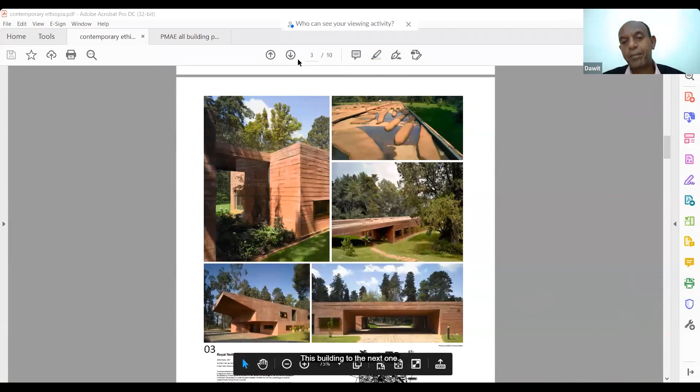The next one is an iconic building by Seleka Belai. When we talk of regionalism, Seleka talks about responding to the climate. You would never see a staircase, a basic circulation, exposed to the elements in the northern hemisphere—you always want to insulate circulation. But Seleka used circulation as a form-defining element. He used the stair, and the stair you can see inside also gives a quality to the internal environment.

He uses minimal colors and always experiments with forms, with minimal windows. For him, using windows to give character to the facade is wrong. The most important thing is light, but not through windows—he is very playful with the use of light and how he admits it in. There are kinds of pigeonholes from the inside that really look like torch lights. They really admit light, but you don't see them on the facade. This is an iconic building, the stairs, an iconic building by Seleka Belai.

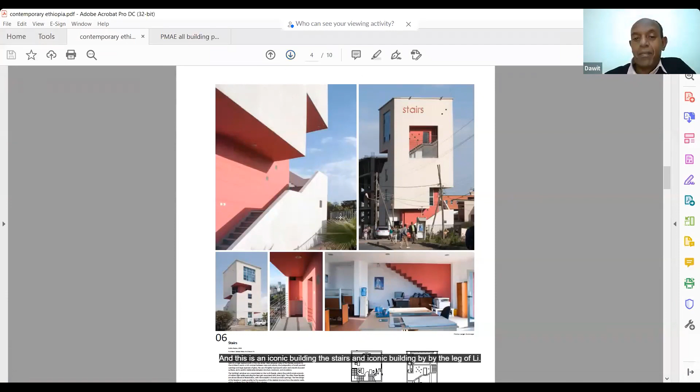This is a building built by a world famous artist. In 2020, Elias Sime was named the African Artist of the Year by the Smithsonian, one of the museums in Washington, D.C.

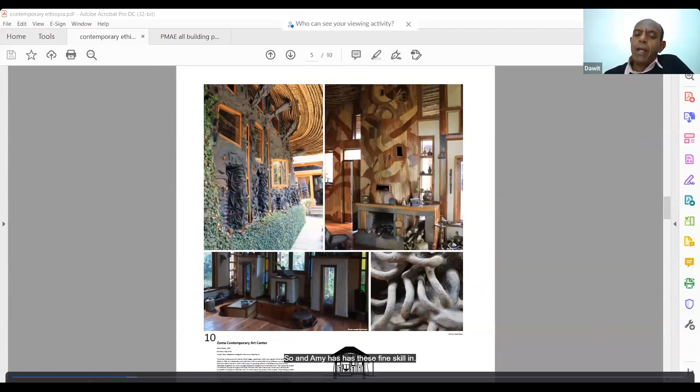Elias Sime uses discarded materials. The skin is made of mud, but the external things are all kind of recycled. If you look at the interior, you have all those mosaics out of wood, each piece recycled. The external material is in a way sculpted, like Antonio Gaudi in mud. Elias has this fine skill in designing the interior space, with negative spaces, positive spaces, space within space. It's a very good material to teach students how to articulate space, and everything is recycled and made out of mud. That's what makes this one special.

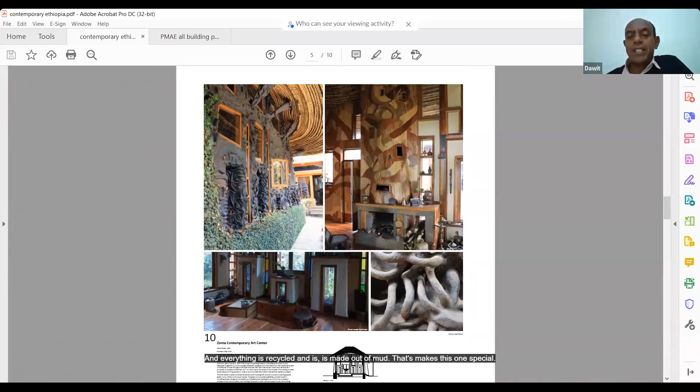This is Ben Abeba restaurant in Lalibela. It looks like some material from a sci-fi or alien kind of structure. If you look at it from the background, it looks very weird, but there were two young boys...

Sorry, did I miss it? Oops. Yeah, thank you.

So there are two young boys, and they carved these. They had a philosophy, and they had to build it there. They were also designing it while building, so they did not do a complete working drawing. They had to be living there for so many months, so it's a complex form. There is a philosophy behind it, but the aesthetics is very special. It's a restaurant, and sitting there, you would see from the top of Lalibela all the valley across the horizon.

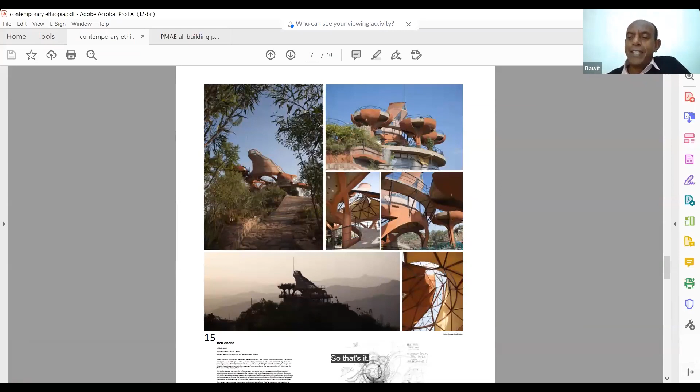Yes, this is the Yemreha building. It's a kind of cooperation between Koffi & Diabaté from Cote d'Ivoire and a local architect, Joseph Abba. It's very contemporary in the way it's used, the materials, how they are exposed. It's one of a kind in the city. What is basic to all the buildings is that they are all labor intensive. We use reinforced concrete 100%, with the exception of a few. It's basically cast in situ; there's no prefab in Ethiopia. And there is a kind of aesthetics that is achieved. That is what I can say about this building.

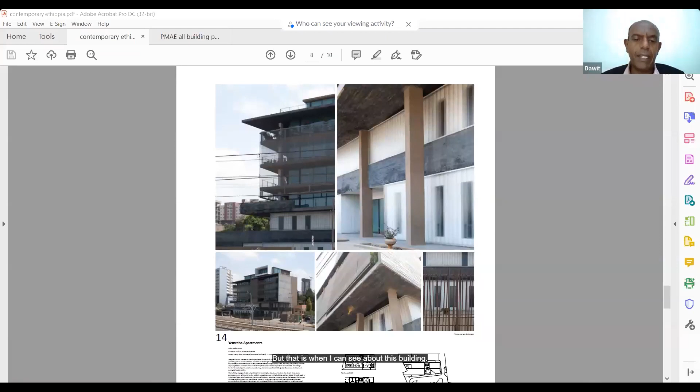If I can interject for a moment about the Yemreha apartments, there are a couple of projects in the exhibition designed by architects from other parts of Africa who are in Ethiopia. One of the things we really liked is that it helps demonstrate how architecture acts as evidence of the worldliness of Ethiopia, especially Addis Ababa, which is a global diplomatic capital. It's the home of the United Nations enterprise in Africa and also the home of the African Union. Because of this, there's a great amount of diplomats and foreign businessmen from all over Africa in Addis Ababa, resulting in projects designed by a really brilliant architect from the Ivory Coast, and you'll see other projects as well in our exhibition.

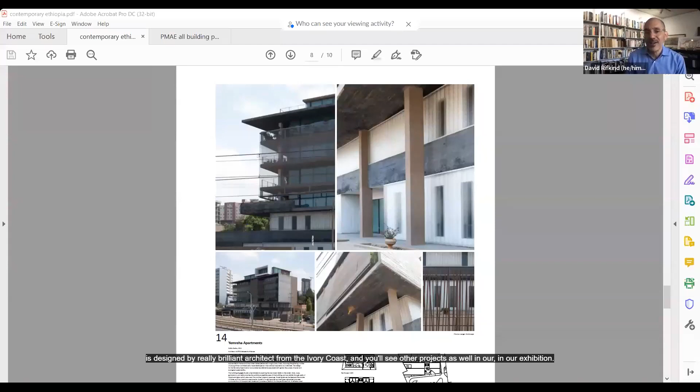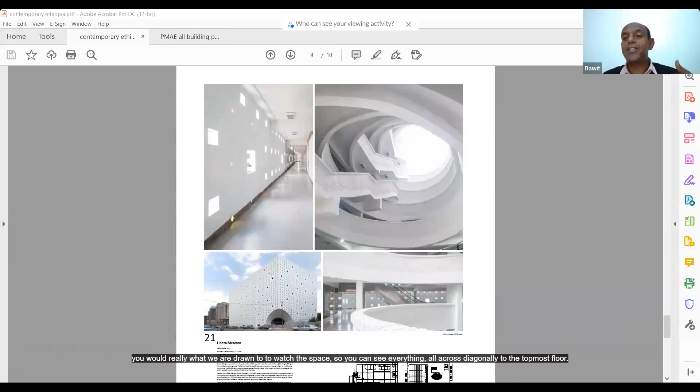I have not been there lately, but it is active, and the diagonal way the spaces go is very interesting. While crossing the street within the building, you're drawn towards the space, seeing everything diagonally up to the topmost floor. The facade material is also done in an innovative manner, using a low-tech casting method, but it really gives a fresh look to the otherwise nondescript facade of the city.

I was struck by how solid the exterior of this project feels, and how that diagonal corner seems carved away, like some of the much older buildings in Ethiopia carved from stone. I was so delighted to see how the interior is not dark or closed in, but has this really inspiring diagonal atrium leading you to the light.

Is it open air the whole time, or is the top glassed in? I can't tell from the image. I'm not very sure, I'll check.

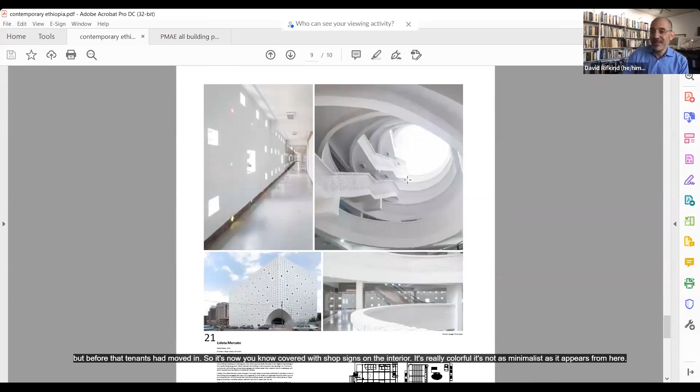No, it is extraordinary. And I remember it being glazed at the top. The one thing that is a little deceptive about our photographs is that we photographed there—actually the photographs are all by Jürgen Strohmeyer, our partner on the project—right when the building was completed, but before the tenants had moved in. So it's now covered with shop signs on the interior. It's really colorful, not as minimalist as it appears here.

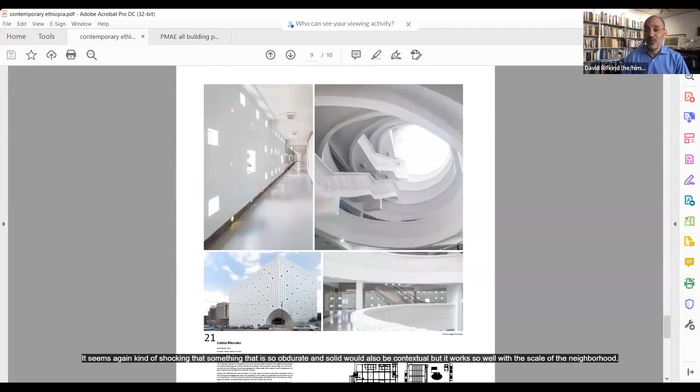Good to know, but I absolutely agree with what you said. The quality of it from the outside feels monolithic, like the rock cut churches in Lalibela, and then you enter into it and it is voluminous and light. It's brilliantly designed, and some of the things hard to tell from photographs is how well it integrates with the neighborhood. It seems shocking that something so obdurate and solid would also be contextual, but it works so well with the scale of the neighborhood.

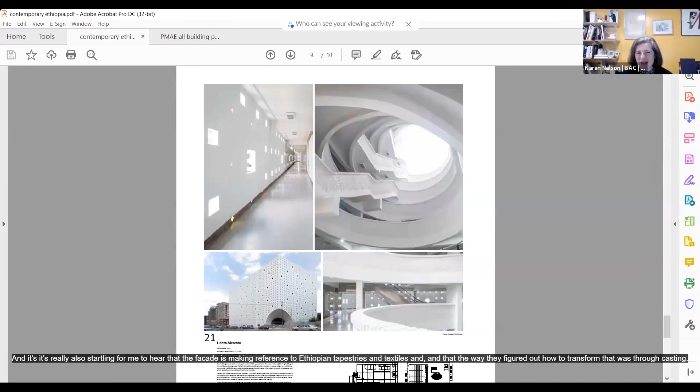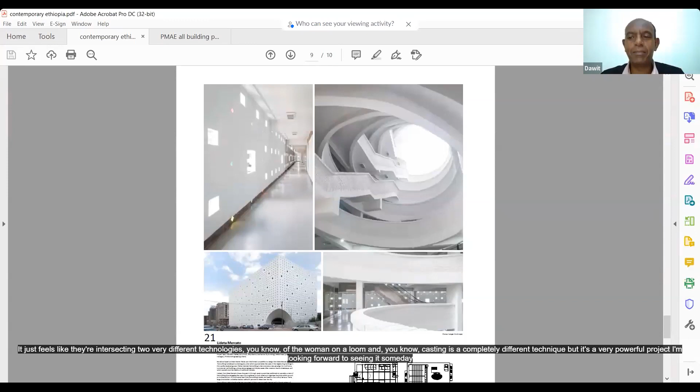It's really startling for me to hear, Dawit, that the facade references Ethiopian tapestries and textiles, and that the way they figured out how to transform that was through casting. It feels like they're intersecting two very different technologies—the woven on a loom, and casting, a completely different technique—but it's a very powerful project. I'm looking forward to seeing it someday.

I feel sad about this project because it's not realized. It was supposed to be built from a competition from the Ethiopian government in 2012, and the winners are from the Netherlands and Ethiopia.

It's very interesting—these represent the drums, like the emperors, when they had to decree, they would use the drum and then declare it before the court, so that would be constituted as part of the law, the legal entity. So these three drums represent two legislative bodies—I'm not very sure how they're called, the councils, the parliament—and the other is a library. They are surrounded by low-lying office space, and the public could also go up and access the roof, making it very near to the community.

I love those drums with the Ethiopian motifs again. If it were built, this would have been the best creative, eye-catching and iconic building in town. They were into the detail design—it was very huge, it really took a huge block at the city center.

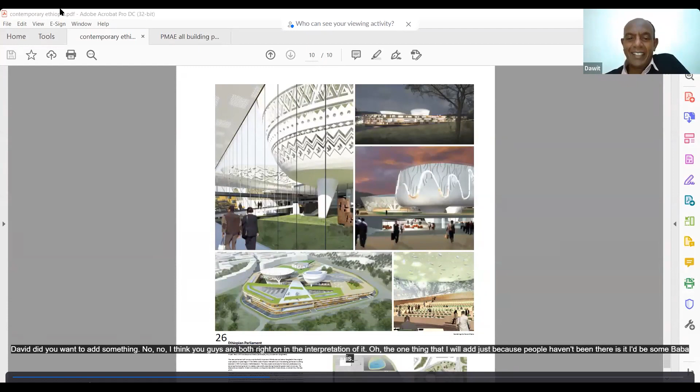David, did you want to add something? No, I think you guys are both right on in the interpretation of it.

The one thing I'll add, for those who haven't been there, is that Addis Ababa, like almost all Ethiopian cities, is quite hilly. The topography is dramatic—there's almost a 2,000 foot change in elevation within the city limits. This site is on a hill very close to the hill that was the center of imperial power when the city was founded.

Because of that topography, one of the brilliant things about the design is that this level top—the datum separating office functions from the dramatic meeting functions—was at ground level at the uppermost part of the site, and several stories in the air by the time you get downhill. This created a tabletop-level public outdoor space that the public could enter at the uppermost level, right at a major traffic intersection.

This was such a wonderful idea because these complexes in Ethiopia tend to be very highly controlled and off limits to the public. Originally there was this promise that the public could inhabit that main upper level, which would have been a really dramatic change in the way you think about the relationship between government and public space. It was a really beautiful project, and it's unfortunate it wasn't realized.

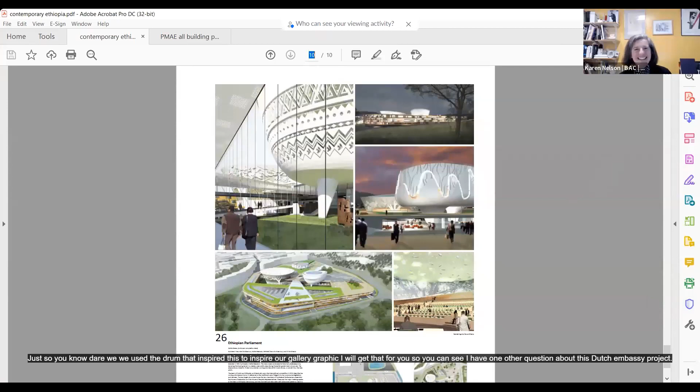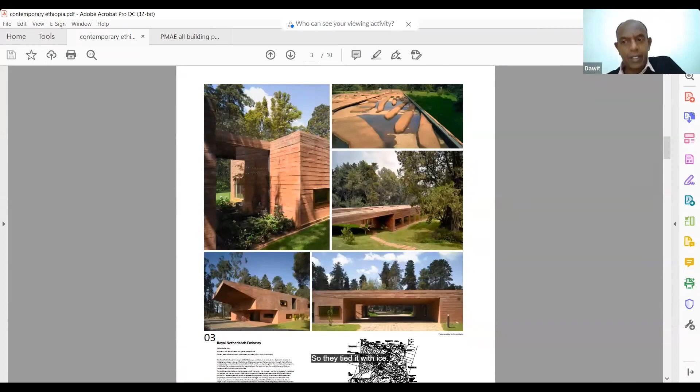The color is basically the color of the sandstone where it's carved out—if you go to Lalibela you'd see it, but here they've used colors with the concrete, finished roughly to relate it to the rough texture of the rock churches. So is this something they actually got from local soil and sand, or did they dye it to match? They dyed it to match. I see, yeah, it's fantastic.

There's a question from Rebecca DeJenny in the chat. Her question is, by designing contemporary buildings, do you think Ethiopia and other African countries are losing touch with vernacular architecture? Not necessarily the projects you've selected, but she remembers going to Addis and seeing so many buildings that seemed out of place.

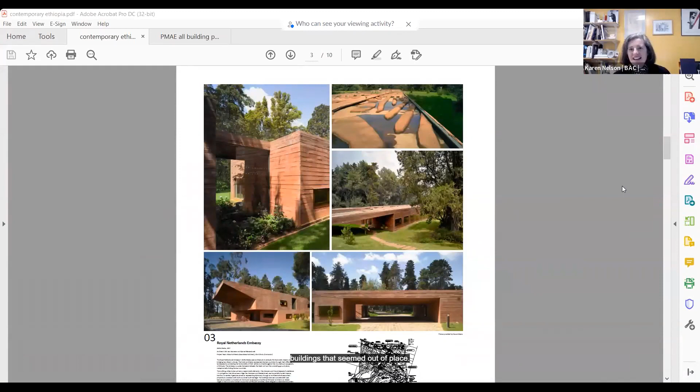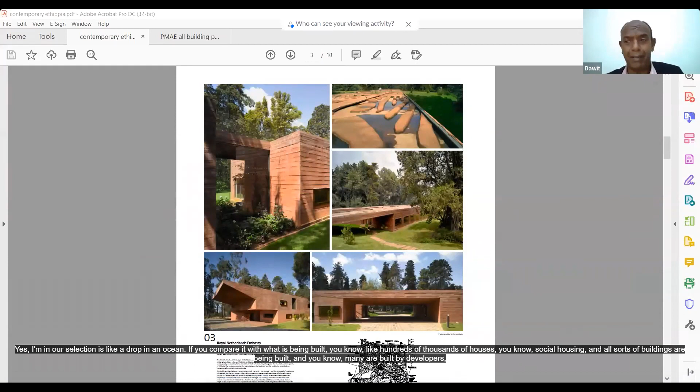Our selection is like a drop in an ocean compared with what is being built—hundreds of thousands of houses, social housing, and all sorts of buildings, many built by developers. They would fly to Shenzhen, Dubai, China, the Middle East, Qatar, and come back wanting to build those skyscrapers. For me, those things are out of place.

They require energy to maintain. Addis has one of the best climates—not because I'm from Addis, but I've traveled to quite a few other places. It's really a very agreeable climate, and we're not building for our climate.

So what she said is true. But this morning we had a lecturer from Malawi, the president of the Malawi Institute of Architects, and we asked her what was Malawian in Lilongwe now. What would be Addis Ababa in Addis?

So what could be? One could be climate, responding to climate. Then you can go to materiality, then sustainability. Our officials now are talking about smart buildings, smart city. Would it be smart like the high-tech, IT-based one built in Vienna, or would it be smart from being low-tech? For me, being low-tech is smart because we're smartly using a lot of labor, unemployed, using local materials, less embodied energy. So there is a kind of misunderstanding between the client, the community, and architects. So what she said is right.

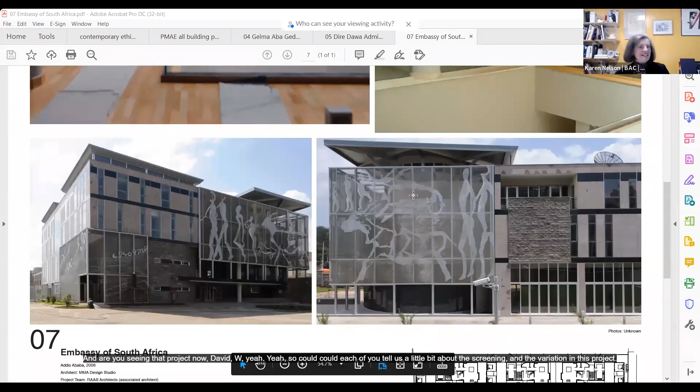I wanted to share one other project and get your take on the tectonics of it. I was surprised by the Embassy of South Africa. Are you seeing that project now, David? Could each of you tell us a little bit about the screening and the variation in this project?

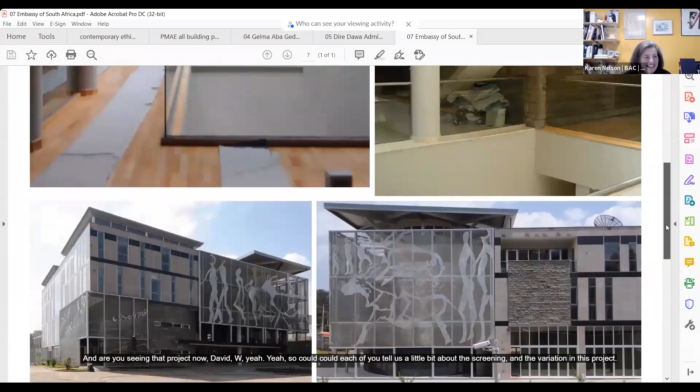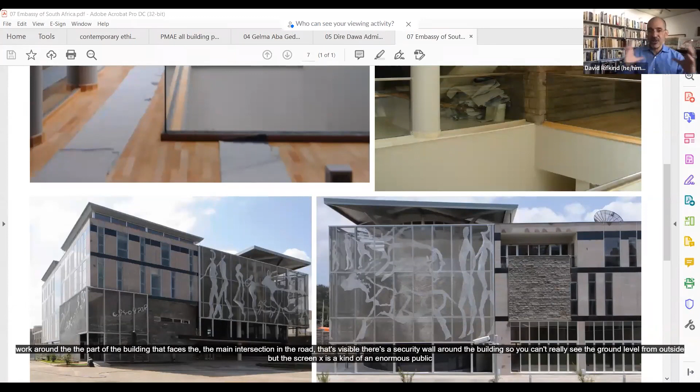Well, one thing is that this is another example of the way that Addis Ababa has ended up as a place with work by architects from other countries in Africa. In this case, it's MMA Studio, really prominent South African architects who worked with, I think, Rahel Shawl on this one, right Dawit? Yes, who's one of the really great, younger generation of Ethiopian architects - our age-ish. But the screens, I think, were the work of a South African artist who was commissioned by the South African government to produce this screen work around the part of the building that faces the main intersection in the road. It's visible - there's a security wall around the building so you can't really see the ground level from outside, but the screen acts as an enormous public artwork that's visible outside. It was an attempt by the South African government to commission work by a South African architect to represent the country in this diplomatic architecture.

Yeah, and this is one of the few buildings that I have not had access to visit, basically. So Addis is a kind of diplomatic city, and there are even papers that talk of how embassies kind of affected the morphology of the city. There are so many embassies, and I have not had the chance to see the building. Again, with how South Africans and Ethiopians collaborated to bring such an aesthetic - you see the transparent material and the very solid stone. In Ethiopia, you have stone as a building material, it's very mountainous. Then there is this transparent facade. Yeah, this is a mix of both cultures. That is what I can talk about this building.

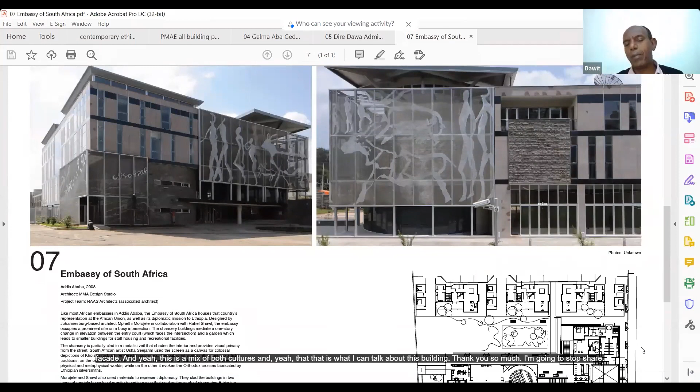Thank you so much. I'm going to stop share there.

So I'm curious, when David spoke in our gallery earlier this autumn, he spoke about some of the organizing principles of the curation of this work. Dawit, I wondered if you could share with us what you were most excited by in the selection of projects, and what maybe resonates with you most about the work that you did select - because as you say, a drop in the ocean of contemporary architecture.

Yeah, so I would say we were pioneers in Ethiopia about talking about architecture. Because after the millennium, as David earlier rightly expressed it, we began to have money. Where there's money, where there's finance, you have art and music and literature, every other of the creative industry. So it was not very easy to select projects because everybody wants that position. I was at the receiving end of criticism even after posting those projects - Dawit, who do you think you are? And fortunately or unfortunately, it was a product of very few artists. Although we selected more than 20 or 25 projects, some were in a way overrepresented.